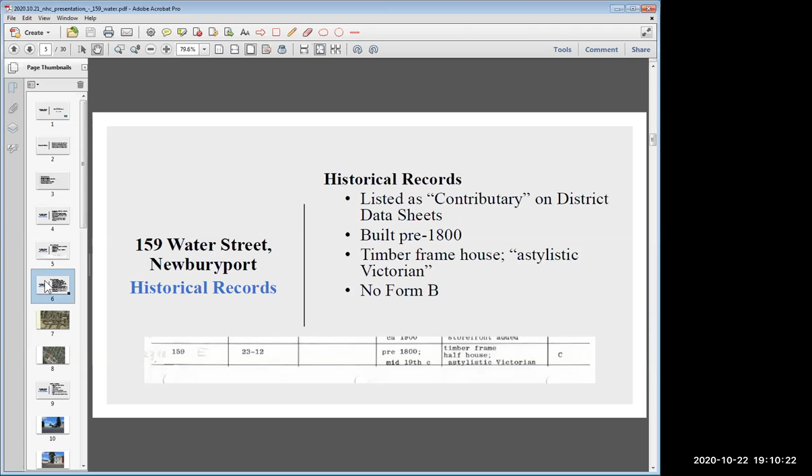If you go to the next slide please. We did a title search back to 1838. We stopped there because at the time, Moses Brown owned a significant portion of this property, including the wharfs. In the early 1800s, Moses Brown was an importer of sugar and molasses and owned a rum distillery in the city. Mr. Brown died in 1827, and this particular parcel of land was left to Mr. Brown's granddaughter, Sarah White Bannister. The property at one time included a store, operated by Ebenezer Plummer. Ms. Bannister conveyed the property to Mr. Plummer in 1838. Around 1929, the store was changed to a home and no longer used for commercial purposes.

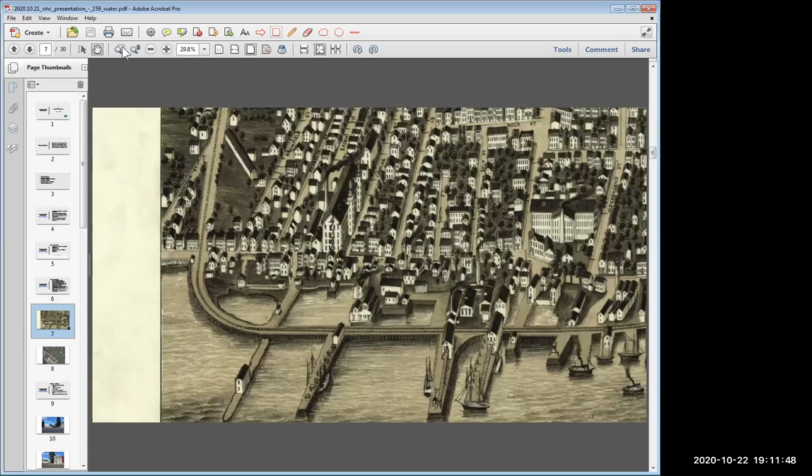If you go to the next slide, Andy. So this is obviously a sketch, not an actual map, but you can see the property - it's actually two separate buildings. If you see the James Steam Mill on the left third of the site, this property is at the bottom of the most leftward wharf that's shown down there. Can you blow that up a little bit, Andy, maybe? There you go.

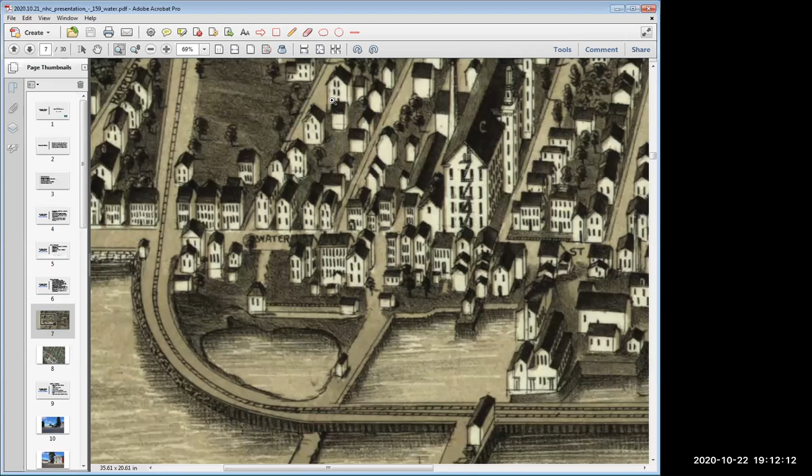So you can see the railroad tracks coming around, but the last wharf is actually at the base of Salem Street. You can see the James Steam Mill there. This property is right now, currently, and we're going to see that on the next slide, right next to the sewer treatment plant. It's at the base of Salem Street on Water Street.

This is the property right here. It's a greenhouse. If you're driving down the street, it's been on the market for a significant period of time. For, I think, obvious reasons, it's a difficult property to sell. My client has been successful rehabilitating a couple of properties here in Newburyport with the help of John Minton, and has purchased this property to do the same.

It's not in the Joppa Historic District, which of course starts further down on Bromfield Street, but it's near it. It has 1,620 square feet of living area and is a 2-story home.

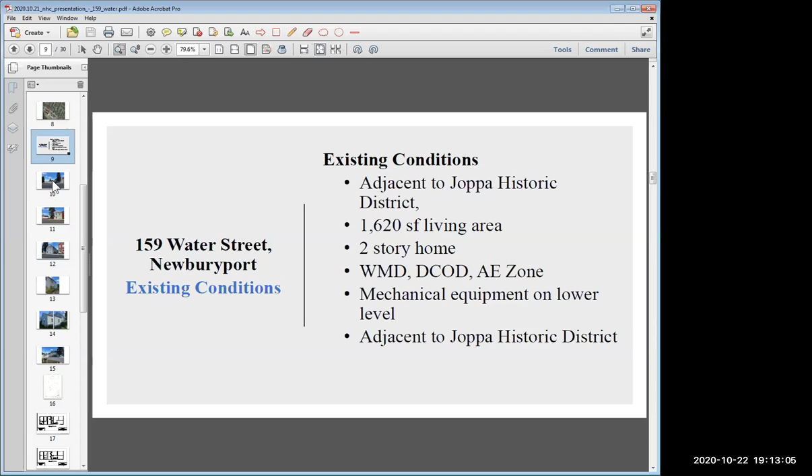Thank you. Ms. Mead, does anyone know when it was last actually lived in? Just curious, I'm going to guess it was a little over 2 years ago. I'm not positive, Mr. Richards. It's been on the market a significant period of time. I do recall cars down there, but time flies when you're in COVID, right?

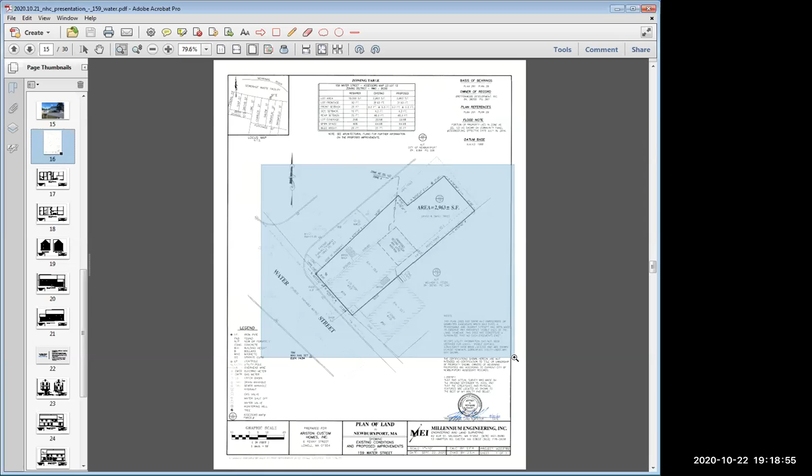Thank you. So if you go to the next slide, please, Andy. So you'll see, and what's important about the site plan is that while it appears as though there is a backyard, there's a drop in the elevation, and essentially you're sitting in the middle of the sewer treatment plant. So one part of the proposals is a little porch that's part of the second floor addition that we're adding in the rear.

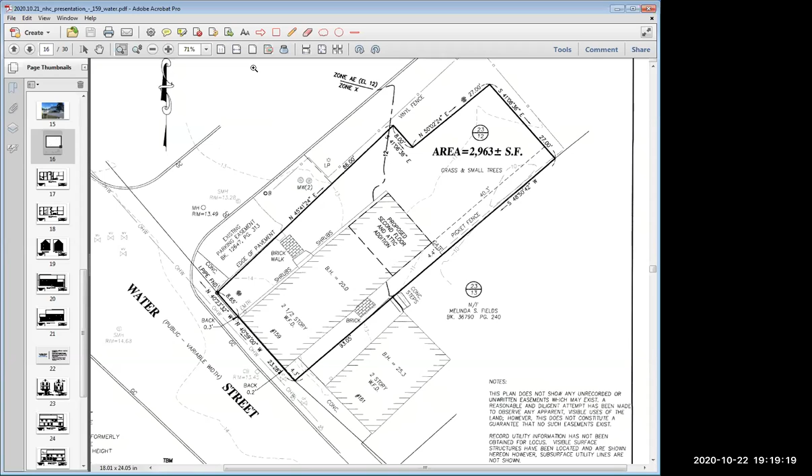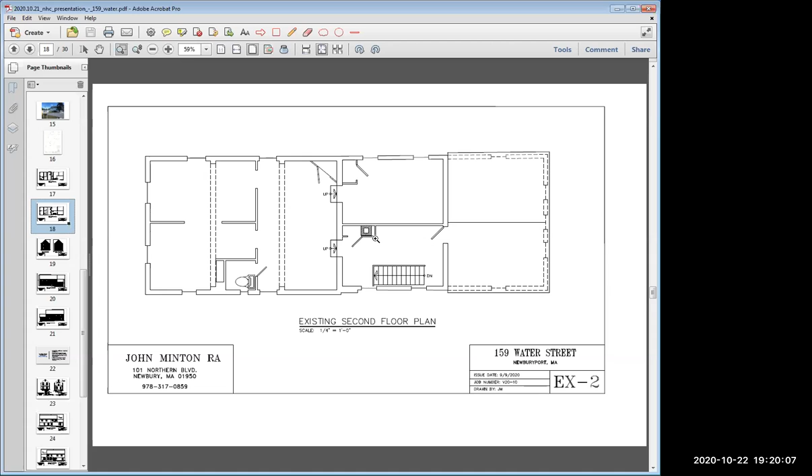So, and if you can go to the next slide. So this is the current second floor plan. You'll see that there's a water closet on the second floor and a couple of bedrooms. And then again, you can see that utility chase that is the chimney that goes up from the basement. And the next slide, please.

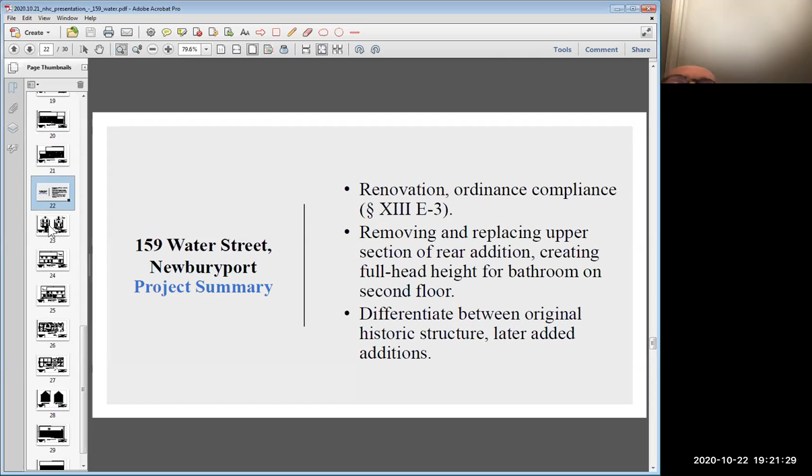So here's the demolition plan, and you can see where the demolition is occurring on the back, and the movement of the windows that exist, and the installation of flood vents.

Could you explain what the function of those is, very briefly? Just curious as to the function of those flood vents. What exactly are they supposed to do?

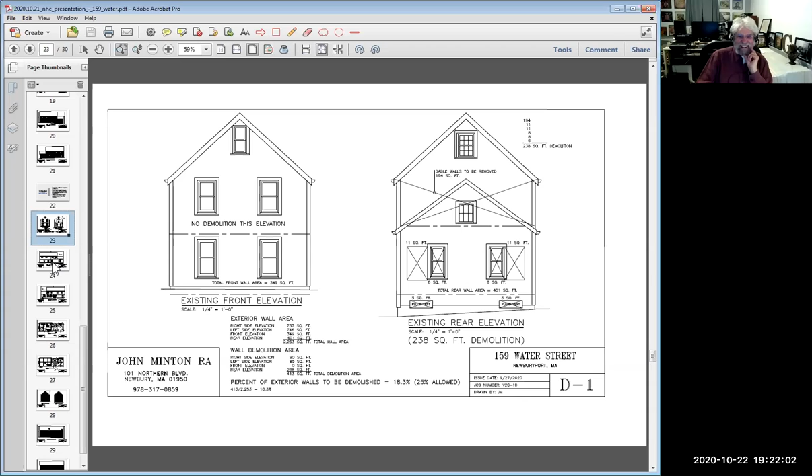I'm going to let Nitin explain the functionality of flood vents. I suspect it's to allow water to move in and out, but I don't know the answer to that for sure. Okay, Attorney Mead, I'm not sure, is he in the audience with us this evening?

We're not seeing him, he's calling in. Andy, you had the phone number earlier. His number doesn't appear to be here, though. Okay, so I can't explain the function of the flood vents. That's fine, not a problem—they are required if you have construction in the flood zone. Yep, not a problem. If we go to the next slide, please.

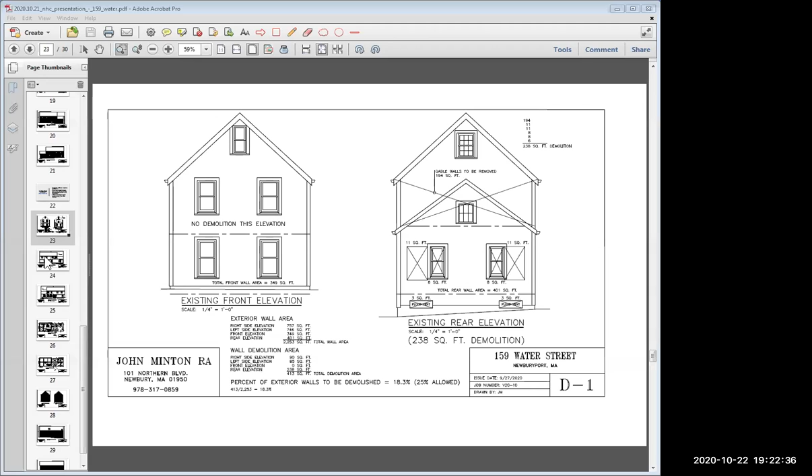So here's the changes that are going to occur on the east elevation. You'll see some changes in the window locations on that later addition, one change on the front addition, and changes in the back. The proposed siding will be cedar clapboard on the original structure, cedar shingles or shakes on the two newer additions. The windows will be the narrow profile, divided light with spacer bars in between, with the simulated divided light on both sides of the windows.

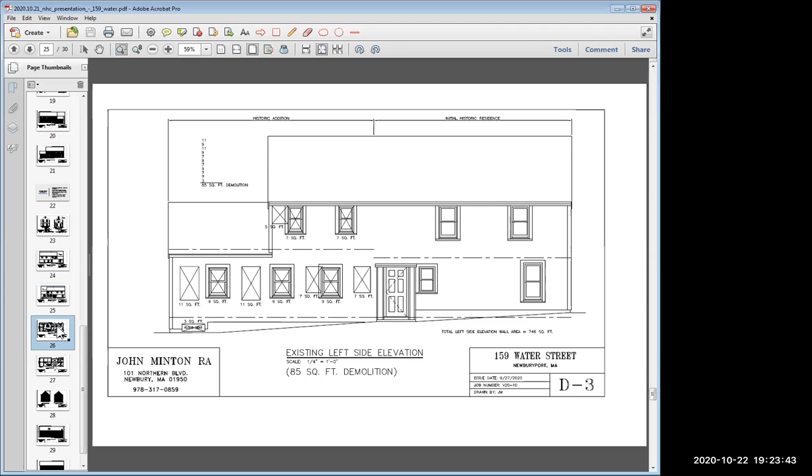Next slide, please, Andy. And so here's the west elevation, and you can see the changes to the windows—you'll understand these when we get to the floor plan. As you can see, changes are minimal, particularly on this side, none to the original historic structure. Next slide, please. And so here's the first floor plan.

It's a 2-bedroom house; he's not making it any more than that. It's going to have 2 bathrooms on the first floor. Then we'll go to the next slide, please, Andy.

The second floor will have a family room up front towards Water Street. As you can see in the back where we're getting a little bit of space, that's the half bath and the hatch into the attic so we can access the mechanicals. The kitchen and living space are up there, and then there's that little balcony off the back.

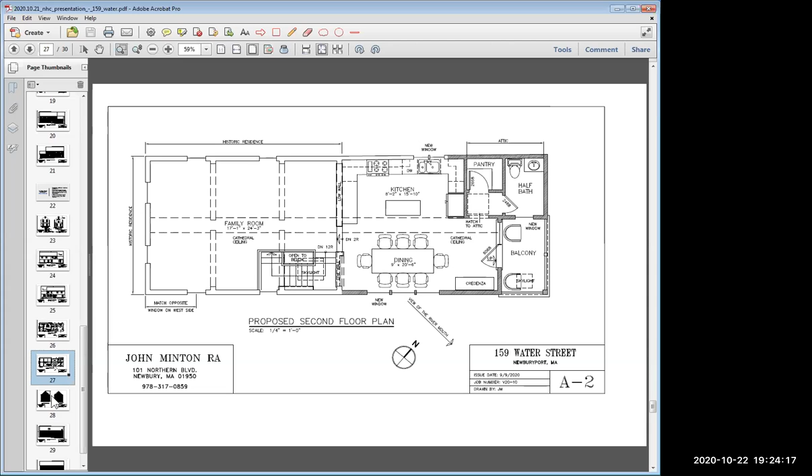Next slide, please, Andy. And here the changes are in elevation. So we have the proposed front elevation—again, no changes are occurring. And here's that rear elevation. So John used a change of materials to differentiate the old from the new.

And he included that when we get to the side elevation, the first addition as well as this second addition. Next slide please, Andy. And here's the proposed right side elevation, or the east. And the next—and the west side elevation.

So I think that our request is that you release it from demo delay to allow these improvements to occur. These are modest changes to allow this house to be functioning again. It has its challenges given its location, and we are trying to have minimal impact on the historic structure, but allow it to have some attractiveness by having that porch on the second floor for some outdoor space.

Because as I remind you, being in the backyard is, quite frankly, closer than comfort to the sewer treatment plant. So with that, I'd request the board vote to remove this from delay.

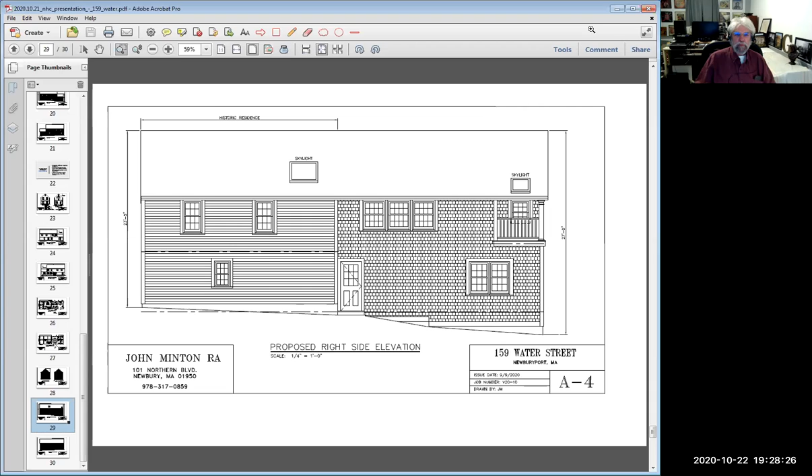I think it will be wonderful to see a project bring this house back to a form that is much more attractive, and I'm very pleased by the proposal. Okay, thank you.

Any other comments from my fellow commissioners? I'm in agreement with Patricia. Okay, that sounded like Mr. McNamee. Yes. Okay.

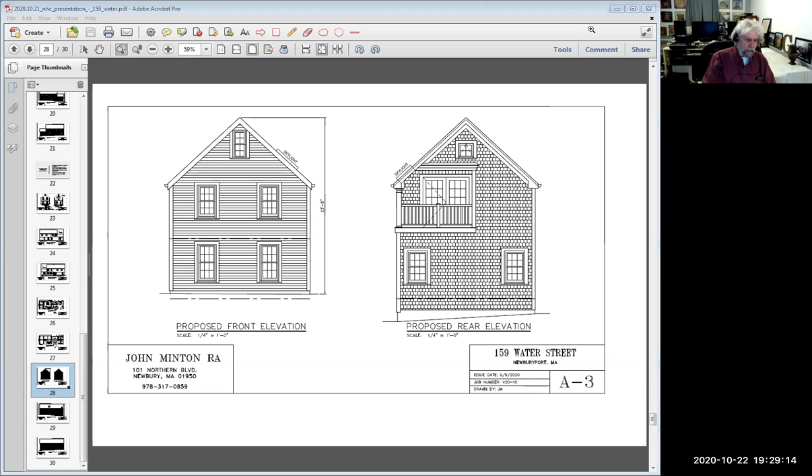I'll comment that I do too. I did have one quick question on either the proposed or existing drawing elevations - the chimney wasn't appearing. What did you comment on at the beginning? So what were you saying - is the chimney to go or to stay, Ms. Mead?

Yeah, it's to go. And I was pointing out that the existing elevations neglected to include it. You can see it in the photograph, but it was purposefully left out of the proposed elevations because it's actually a utility chase, not a chimney, for the home - some sort of heating system. So the utilities going up into the attic, I assume they'll have some other way of venting accomplished through other means. That's correct. Okay.

Okay, one last call for questions or comments. Not really seeing any - would anyone like to? There are a couple hands up. Oh, I'm sorry - Mr. Fay and Mr. Morgan. Okay, maybe I need to turn this on so I can see the hands. Okay, we'll start with Mr. Fay since you're first on my list. Christopher, you want to make a comment?

Yeah, I just want to say I don't love the tiny little porch roof deck in the back, but considering the overall condition of the house and stuff like that, I'll take the greater good here. But I don't want people to misinterpret my voting for this as a love of the roof deck, as tiny as it may be.

It's interesting you should point that out, because when I saw this, with the possible exception of that sort of Doric column, which is a little odd, I thought that enclosed little quasi porch patio, whatever you want to call it, on the second floor was somewhat less objectionable than some of the roof decks we've seen, which stick out more sore thumb-ishly. It's less objectionable, that's a good way to put it. Yeah, Mr. Morgan, you had a comment.

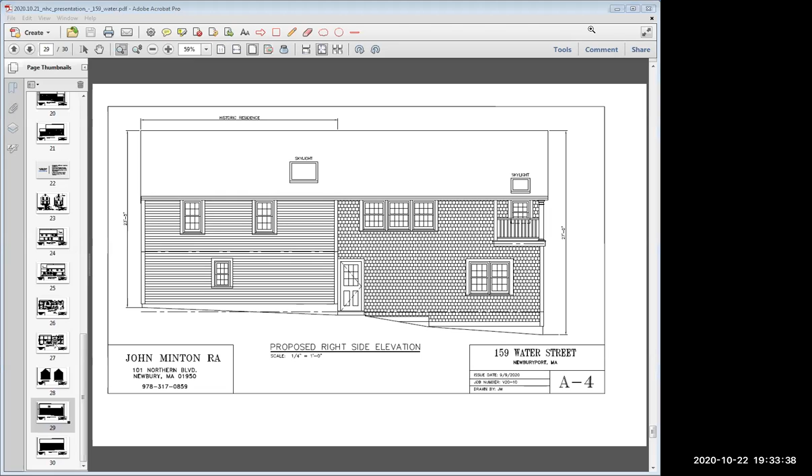I think, given the location of the property, they're not wood. I think they're aluminum clad, and they are the narrow profile with the spacer bars both inside and out, with separate grills inside and out. Okay, so yes, those are usually referred to as simulated divided light. Am I correct that those are considered simulated divided light? Yes.

Joe, can you think of anything else we should specify being called out? There's not a heck of a lot of trim there, really. Yeah, I think we would see that called out, the corner boards. It's really a material scope of items to be replaced. It looks like a lot of it is in pretty bad shape on the existing building, and I assume that much of it, if not most, will be replaced. But I think, for the record, it would be good to have those notes on the drawing. Eventually they're going to get here anyway, so we might as well see that at some point to establish a benchmark.

Okay. Well, I've got that list. So yeah, Attorney Mead, I think we can accomplish that. I don't think that's an unreasonable thing. So to save time, I'll try to craft the motion myself here and then see if someone was willing to second that.

So the motion would be that we release the project for a demolition permit following these plans as submitted tonight, with the condition that the specific materials be called out, including but not exclusively: that the clapboards in the front historic section be cedar clapboards, cedar shingles or shakes on the newer section, 6/6 simulated divided light windows, and specific call out for trim materials such as the window trim and corner boards, be identified prior to the issuing of the actual permit.

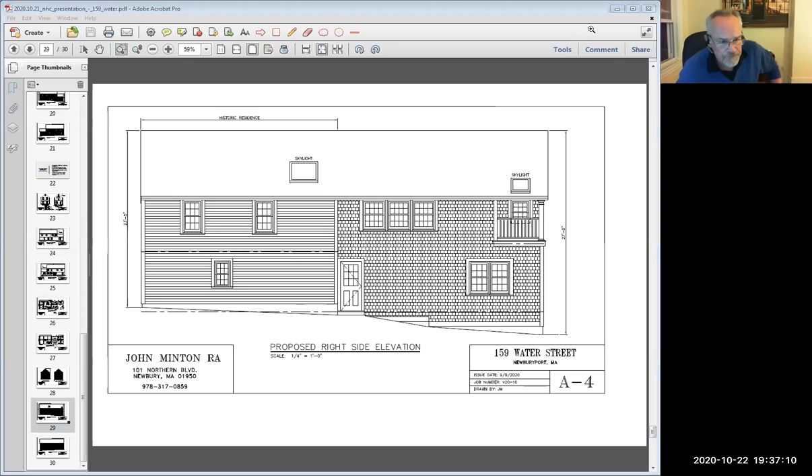I'm just pausing here because I'm trying to think of the most expedient way to meet that condition, Attorney Mead, so that we can resolve this in a way that we're satisfied and the building commissioner is satisfied and your client has the final plans we can go on and all that. Is that something that you can have either the architect or someone submit to the planning office, sometime within the next week or so?

Yes, we'll ask the architect to do that for sure, because as soon as we're done with the zoning board, they're going to want to pull a building permit. So we will definitely do that. Okay, I'll make a note here. Applicant to submit.

Thank you very much. Okay, good. Forgive me for trying to keep up and make my notes and keep everything going here. I believe we are then done with 159 Water Street as far as this meeting anyway.

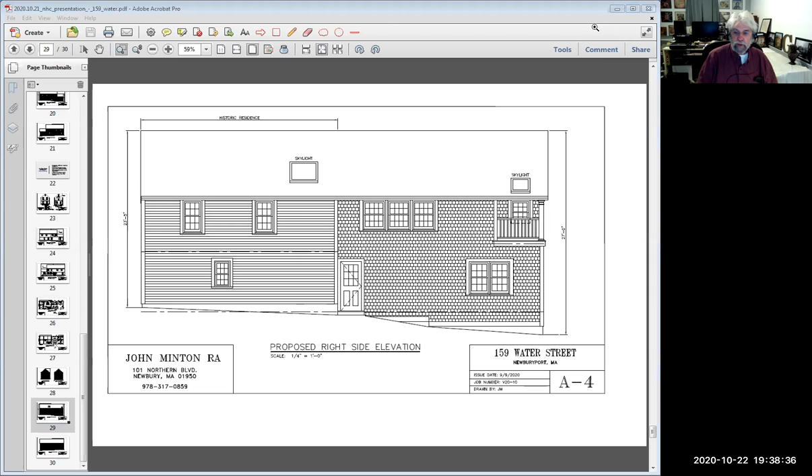So next, we can move on to the next item on the agenda, which is 93 State Street, Institution for Savings, commonly known as. This is a Demolition Overlay District Advisory Review. I'm not going to go into the entire history. It goes all the way back to the beginning of the year. I know.

I'd be surprised if anyone wasn't familiar with it, but the high points are that this is roughly, if we issue an advisory review again, which I expect we will, it will be the third one. The first was 13th of February this year. Then there was another one on 25th of June. And this is the third go round. Two weeks ago, there was a presentation by the applicant, which went through plans, elevations, renderings, and so forth. And we also took public comment at that time, which was fairly extensive.

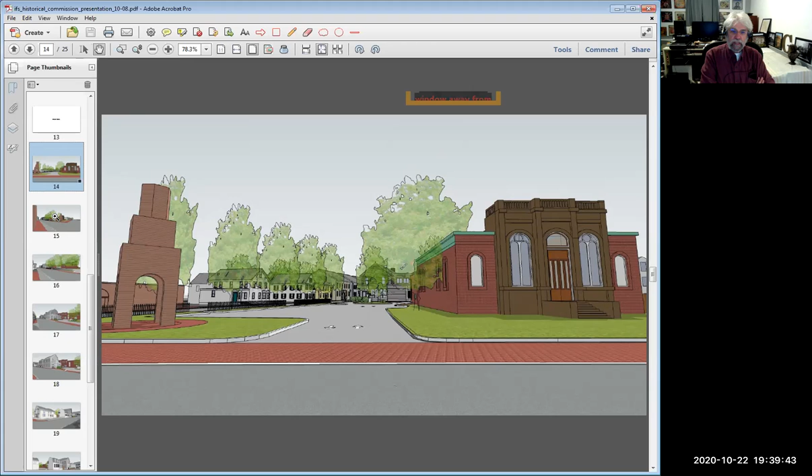We heard similar comments as we heard the first go around, some reflective of the newer thing, but some pretty much echoing earlier concerns. My goal tonight is to go around with my fellow board members here to collect their thoughts so that I can compile them into this third advisory review.

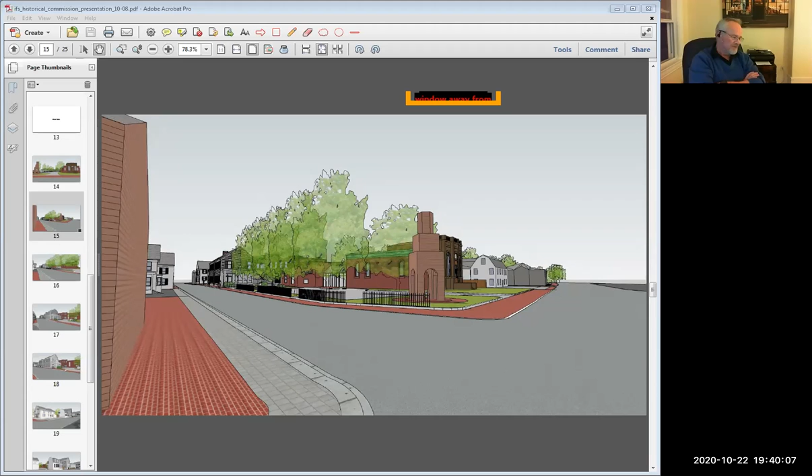Could you recognize Mr. McNamee before we start on this? Oh, he probably wants to say that he's recusing himself. Am I right, Peter? Once again, because I'm an interested party, yes, I'm going to recuse myself. Thank you, Chair. Yes, I had it in my notes to mention that, and I forgot to point it out. Thank you, Peter. So Mr. McNamee, I'm not sure he's in abutter, but he's a near neighbor and is an interested party, so he's recused himself from this particular matter. Thank you, Peter.

Anyway, so Attorney Mead, I assume you're still speaking on behalf of the applicant. Although we're not going through the entire presentation again, I thought if you want to just make any brief comments or updates since we last spoke two weeks ago, you can have the floor for a couple of minutes to do that before I go around with my fellow commissioners. Do you wish to do that?

I think I'd prefer to respond to any questions. Christopher Angelakis is on, as well as Shreya Shah, who are the architects on the project. I think we had some discussion two weeks ago by Mr. Morgan and others relative to the location and differentiation of the proposed addition compared to the historical structure, and how it's now separate and apart from it. And the discussion relative to the massing and scale being appropriate for the neighborhood. So I'd like to just hear what the commission has to say and then answer any questions that Christopher and I need to.

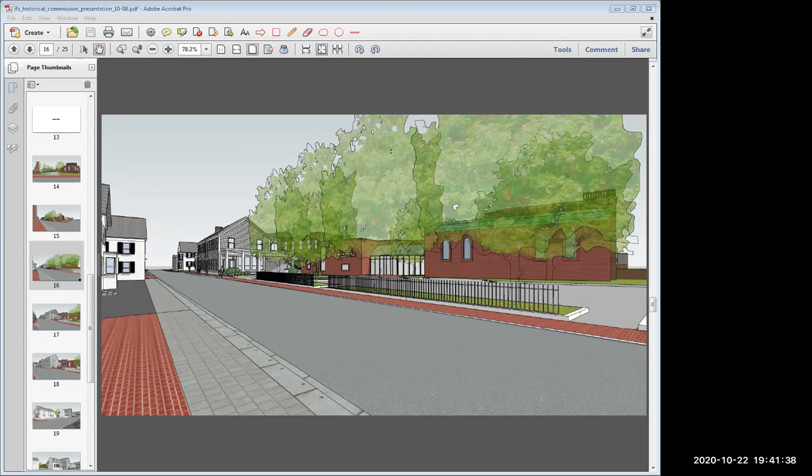Okay, that sounds fine. And I'll abuse my right here as chair to kick it off. I had a question that was on my mind, so I'll start there. This is a question for either you or the architect. One of the things we all heard a lot of, people would generically use the term size, or massing, or height, but there's still a lot of concern about that. It seems to me that a lot of what's driving that is the parking system on the first floor, because that's driving the height of the first floor to about 16 feet, which is obviously higher than a typical first floor would be. I think that sets the stage for everything else above it to also be higher than normal. So my question is, was there any research or consideration of whether it'd be possible to somehow bring that whole parking system down a few feet, so that first floor ceiling height and eave height could be much more on a par with a residential type of environment?

So I think that's a really good question, Mr. Chair. The parking is compressed as it can be. We actually cannot go down any other levels within the building. We have one level below grade, which is what the fire department will approve. They won't approve anything more than that. I think it's important that from the very first concept design of this current design, there were some concerns relative to the eave height. I'll let Christopher address that in a minute, but we did bring the eave height down from that. So the eave height is now at 25, and the buildings across the street, which are actually much larger buildings, both by their frontage along Prospect Street and their depth away from Prospect Street, are just over a foot shorter than that. So this structure is not out of line with the surrounding neighborhood. I think that's a good handoff to Christopher about how they designed these sections and the height of the building.

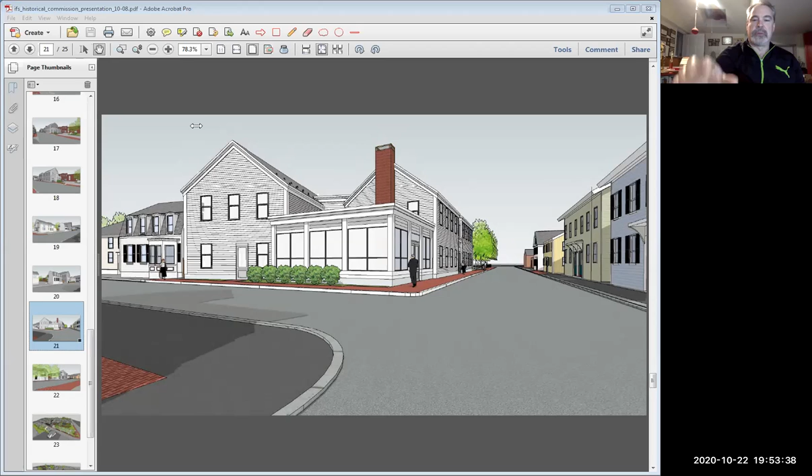I don't have anything new to add than what I've said in the past, but I'll say the same thing over. I walked down State Street a couple of days ago. I stopped, I looked at the bank from the front. You see the beautiful building. You see this weird addition in the back that probably should have never been done. And then you sort of see the emptiness, and I tried to imagine it. And one of the things that struck me is it looks great. It really does. I think the combination of suggestions that we provided and the work that's been done here looks great. It's just doesn't look great here.

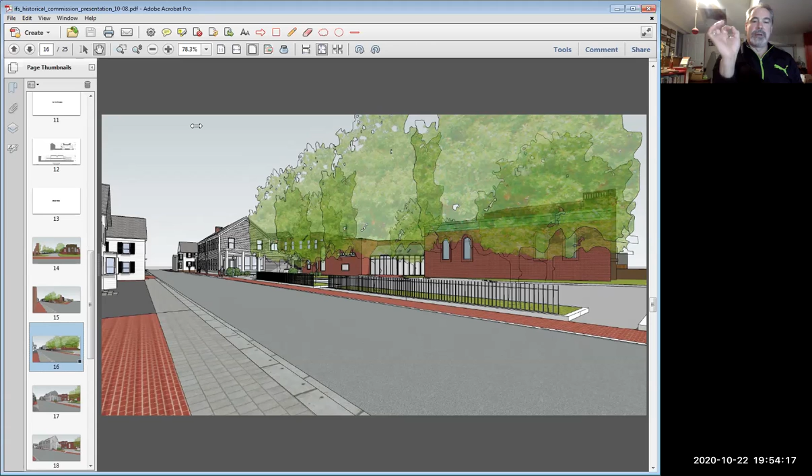It would be great if we did buildings like this in other places in the city, outside of the downtown, outside of historic areas, out in the plazas. If they had done the plazas like this, how much nicer would it be? I just don't think it works here. It looks, again, like a serpent. The way it is currently constituted, this addition would do more to that, and, to beat down on a metaphor, it's going to swallow up this neighborhood. And I think maybe the other slide, that aerial view, it's just shocking to me how big the size of the footprint is. So I don't have anything new to add, I just have the old stuff to add. I don't support this. Unfortunately, I just don't support it.

Okay, so when you say, Chris, it looks great but doesn't look great here... excuse me, I'll get to you in one second, Ron. I just want to clarify one thing. When you say looks great but doesn't look great here, you're saying in the context of this little neighborhood. Is that what you mean, Chris?

I think it's a good idea, but it just doesn't fit the city here. If it was out at the other, I believe there's another branch or another set of buildings out near the Dunkin' Donuts on One, Storey Ave, yeah, it would be good. And that's a beautiful building, and it fits there. It's the best building in the area.

You know, a lot of people do this. They have these types of regulations. I think about Freeport, their McDonald's looks like this, right? But it's not in a downtown historic area, and the neighborhood doesn't support it. So I don't know why people are pushing for this, as I wouldn't want this across from me, next to me, down the street from me.

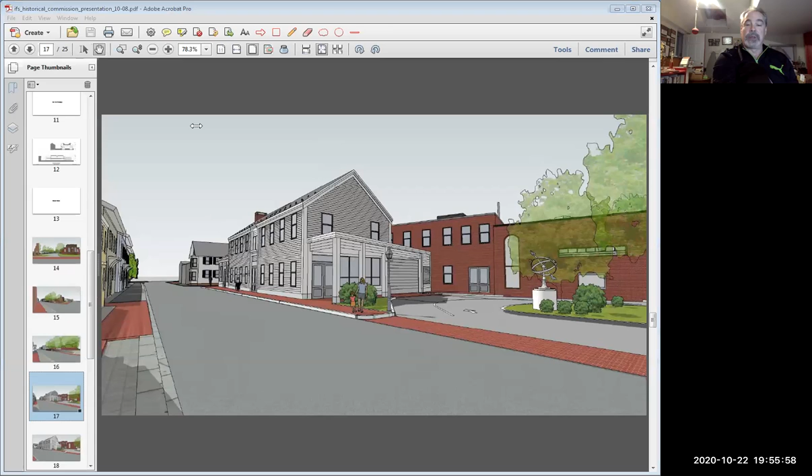Thanks, Chris. And I think one more thing - I know it's zoned for commercial, but that doesn't mean you have to do it. Just because it's zoned for that doesn't mean you have to go ahead and do it.

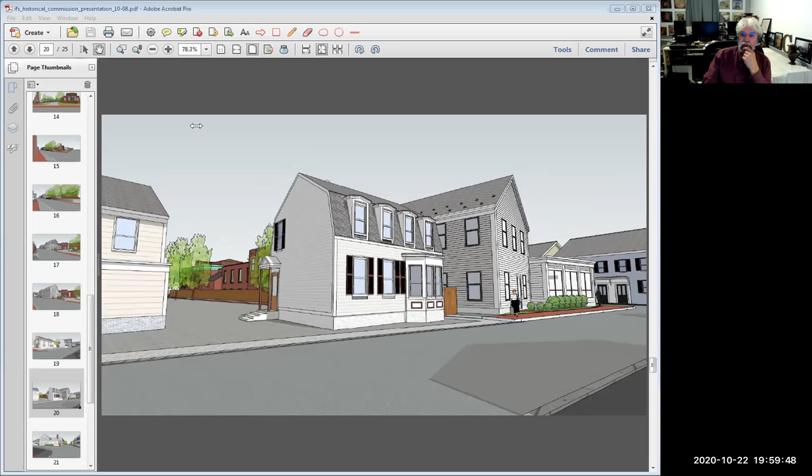Great, okay. So the DOD ordinance, as we all know, requires our adherence to any relevant provisions of the Secretary of the Interior standards, as they may be amended from time to time, including all related guidelines, bulletins, and other official guidance promulgated by the National Park Service. So the National Park Service interprets the standards in its various bulletins.

So I went through what those related guidelines and bulletins and the official guidance says about additions to historic buildings and how to assess their impact on a historic neighborhood. So I want to go through the first one.

In its Technical Preservation Services brief on new additions to historic buildings, the National Park Service explains that in accordance with Standard 9, a new addition must be compatible with the historic building's massing, size, and scale. The quote: size, scale, and massing pertain to the addition's overall volume and three-dimensional qualities. Together they are critical for ensuring a new addition is subordinate to the historic building. Typically, a compatible addition should be smaller than the historic building in both height and footprint, though depending on location, an addition slightly taller or larger may be acceptable as long as it remains visually subordinate.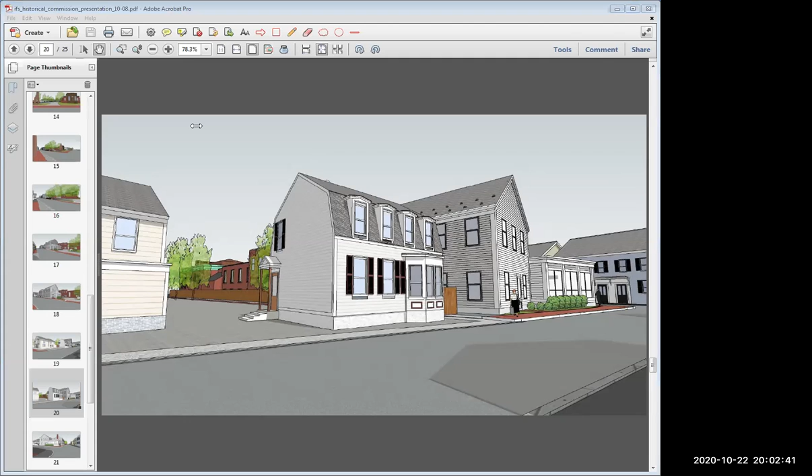The third publication I looked at is New Exterior Additions on Historic Buildings, Preservation Concerns, in which the National Park Service says a new addition should always be subordinate and not compete in size or scale. Although the appropriate size can't be stated as a square footage ratio, the size and setting help define the general parameters for enlargement, and correctly assessing the relationship between actual size and relative scale is the key. The terms size, scale, and massing are repeated throughout National Park Service publications in relation to the historic structure and to the setting and context buildings.

The next publication I looked at, New Additions to Historic Buildings, says that when visible and in close proximity to historic buildings, the new construction must be subordinate to those buildings.

The fifth one I looked at is New Construction Within the Boundaries of Historic Properties, a Technical Preservation Services brief, meaning new construction on the same lot as a historic property. It says the limitations on the size and scale of new construction may be less critical the farther it is located from any other historic building. The quote: protecting the historic setting and context of a property, including the degree of open space and building density, must always be considered when planning new construction on a historic site.

The next one I looked at, New Exterior Additions to Historic Buildings, Preservation Concerns, Guidance on New Additions, says certain historic structures may be so massive in size that a relatively large scale addition may not compromise the historic character, provided the addition is still smaller than the historic building. Occasionally the visible size of an addition can be reduced by placing some spaces or support systems underground.

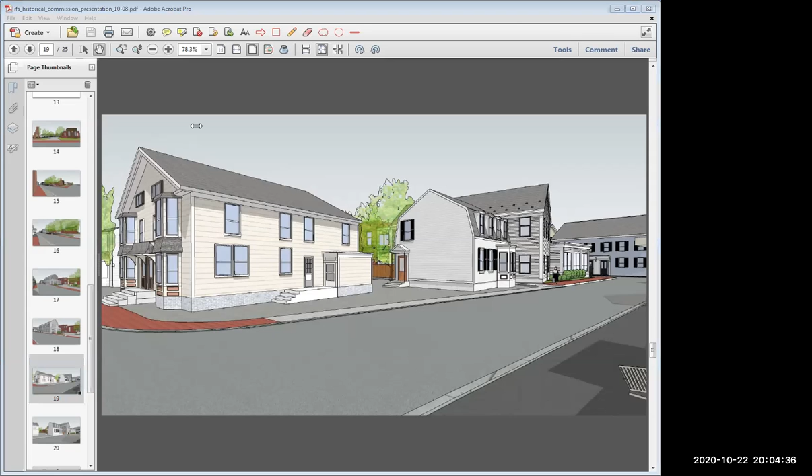Next I looked at a document called Incompatible New Additions to Historic Buildings, which I can't show you, but there's an illustration in figure 16 showing that doubling the size of a historic building means it won't meet the standards. The next one is Designing a New Exterior Addition to a Historic Building, and the Park Service says the new addition should be smaller than the historic building and should be subordinate in both size and design to the historic building.

The last one I'll quote from today, New Additions in Densely Built Environments, says it's important to design an addition that will have the least impact on the historic building and district, and that the addition has to reinforce the scale and character of the district.

Speaking just as myself, without having read any of that, do I love Joe Morgan's idea about how to make the design of the addition fit in better?

Do I respect all the work that these architects put into the design? I very much do. I think these architects are very impressive. I think the design seeks to put the structure into conversation with the residential buildings by trying to break up the massing and incorporating design elements from the historic houses. I love the wooden painted doors.

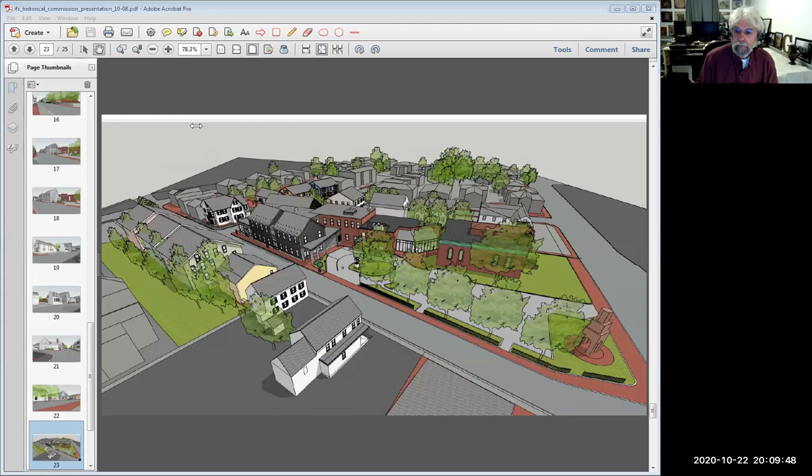Now, your hand is still up. You said you're on the phone right now, Patricia? Yes, I'll try to put my hand down. I know *9 raises it, so maybe *9 will lower it. I don't know, okay, I'll try. Ignore me until I yell.

Okay, very good. Were you all set, Patricia, as far as comments? Yes, I am. Thank you very much.

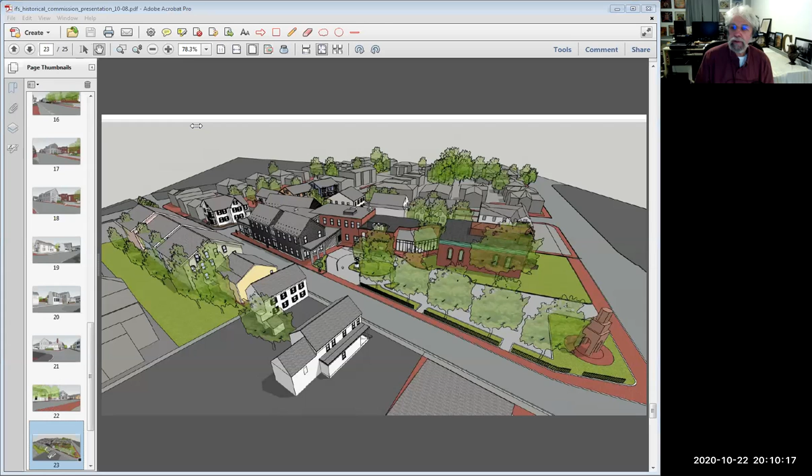Okay, any other member of our group have a comment? We've heard from Joe, Ron. I guess we've heard from just about everybody. Peter has recused himself, so we won't be hearing from Peter. I've asked a couple of questions.

It's an interesting situation. I will compile all this. I'll kind of wrap this up. It's a tough one. I'll give one last brief opportunity for either the architect or the attorney, Ms. Mead, if you'd like to make any closing remarks before we move on to the next agenda item.

Thank you, Mr. Chair. I think that I actually might disagree with the analysis that Ms. Pecknick did under the fresh test. And in fact, I think it actually highlights how the new design complies with those criteria. But because I am not the designer and Christopher is, I will let him have the closing comments.

Okay, that's Mr. Angelakis. Did you, yes, do you want to do that?

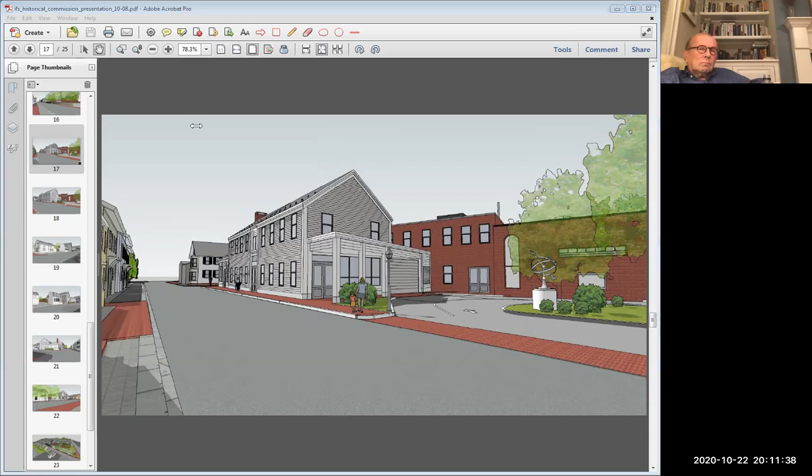Yes. Well, thank you. I think those standards are very important, and I think this team has read those standards over and over again, and we have did everything possible. And I think that this commission has acknowledged that we've done everything possible here to play a very nuanced hand to make sure that this project is subordinate to the historic building that's 150 feet away.

I would challenge that we are doing an addition to the 1871 building. I think we can all agree that that is not what's happening. This building may be placed in a historic setting, but I think we've checked off all of those check boxes to the fresh test in relationship to the historic setting. There are certainly buildings that hold equally as large a footprint, and I think that's the one that challenges us against the fresh test the best.

But if you think about this building as being placed within a historic setting and not a building that's being attached directly to a historic building, I think we can all say that this building does pass that fresh test. So I think saying anything more would be redundant. I'm happy to respond to anyone else's comments if they wish.

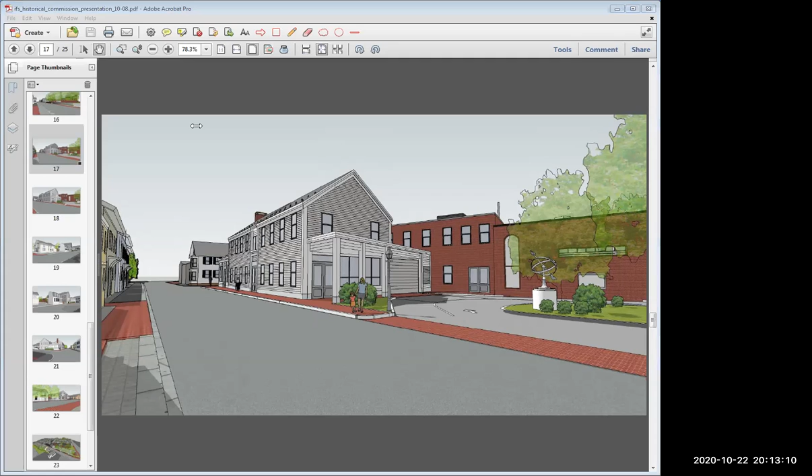I think we're okay. I'll just check in one last time. I'm not seeing any hands raised on the part of the commission. Going once, going twice. I think we're good there. Okay. No, I think we're good.

I appreciate very much your attendance once again. I know it's been trying, a long haul, both for the applicants, the architects, the attorneys, for everybody, and the commission, and the members of the public. I know there are probably a lot of members of the public watching this Zoom meeting right now. I'm not keeping track, but I know the public is extremely interested in this, and we'll do our best, meaning the Historic Commission, to provide whatever meaningful guidance we can to the planning board in that report. So thank you very much for that presentation.

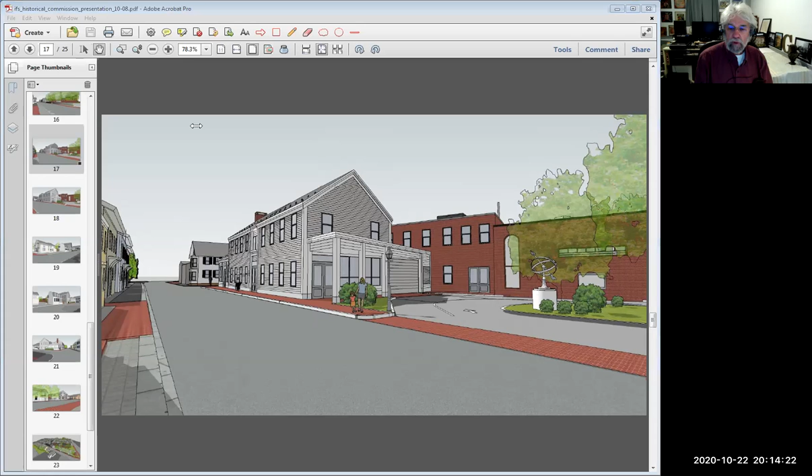Okay, I think we can move on to the next agenda item, which is, well, I was going to say next door, but it's not next door. It's across the street, 94 State Street. This is the Newburyport Public Library building.

The background here is this is a discussion of the preservation restriction for the public library. The public library has applied for, and I think they've got tentative approval for, some grant money from CPA for the HVAC system to make sure that their very valuable and important collections are well preserved.

As part of that arrangement, they do need to have a preservation restriction on the property, which they should have anyway. I'll point out that because this is a building owned by the city, the Historical Commission would not be the grantee of this; it would be the Museum of Old Newbury. So when we get to that point, if Ms. Susan Edwards, who's with the museum, is here and would like to speak, we'll certainly allow her comment on this.

First, so that's the background of this, and I would be remiss if I didn't thank our member Joe Morgan for his very, very helpful work on putting together this preservation restriction, particularly the excellent description of the property.

So Ms. Giselle Stevens, are you there in the attendees? Oh yeah, and I see your hand is up, great. So Andy, can you unmute Ms. Stevens so she can address the board here? Yes, go ahead. All right, good evening, everyone. Can you hear me? We can hear you.

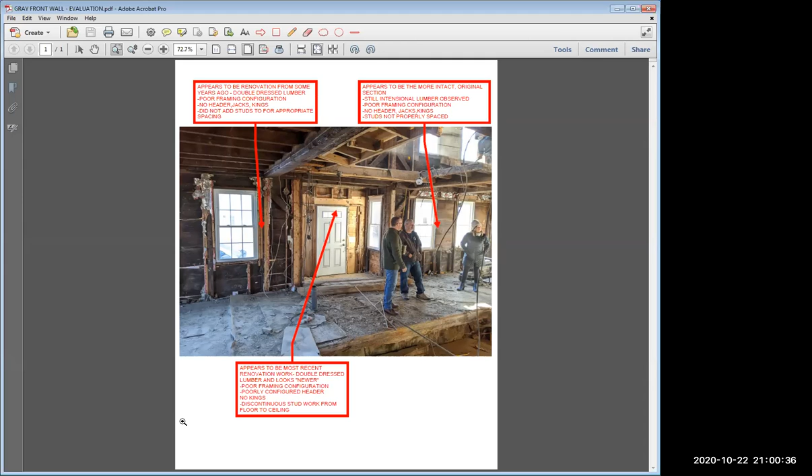I guess this might be where I come in. Who's speaking? This is Dan Webb, Webb Structural Services. I was retained as the engineer for this project.

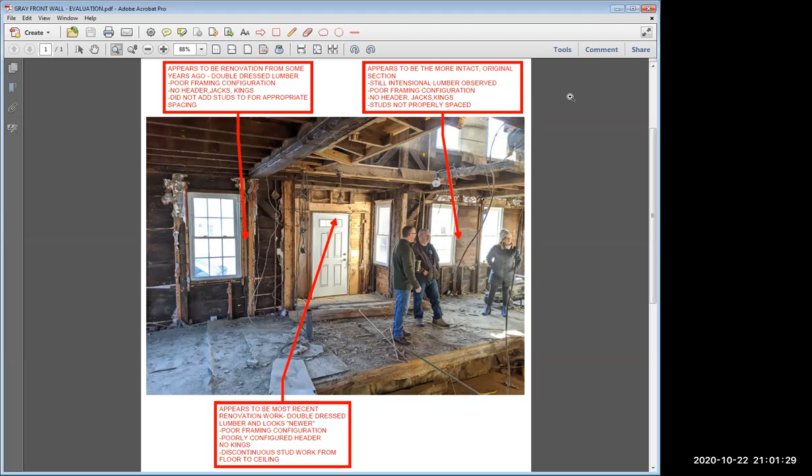Thank you. So I think a picture is worth a thousand words, and this one's great. Starting from right to left on the screen, short of my chicken scratch notes, part of which are even illegible, you can see over on the right, zooming in, a little bit more of the original framing of the building, just by the characteristics of the wood. And you can see how poorly configured it was.

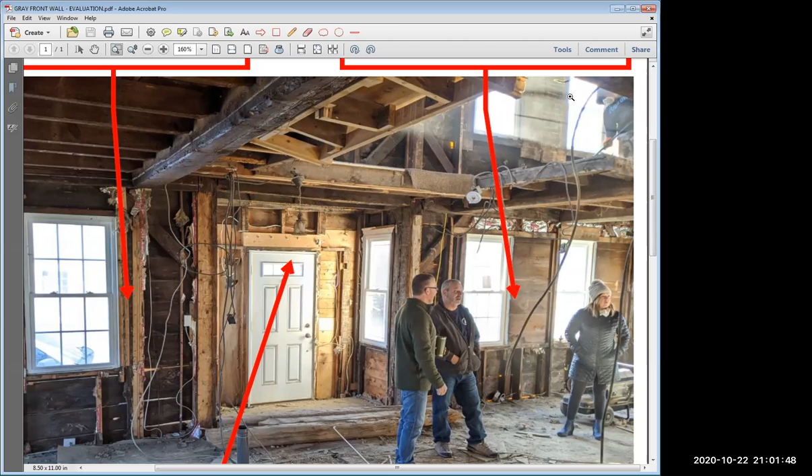There could have also been a window alteration in this area at some point in time, but you can see how the framing is clearly not up to code. The spacing is not appropriate. Wall sheathing is acting more as a structural element than a sheathing element. And the window is certainly not supported properly on its sides. So that's kind of what I would consider the most vintage framing of this building.

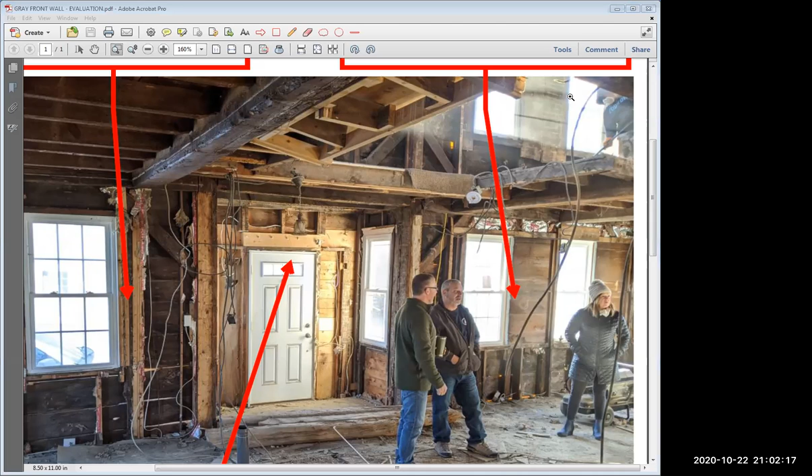If you were to then hop all the way over to the left side of the building—well, just a quick question first: that big opening above your heads there, how did that happen? Like where the second floor is partly missing, was that intentional? I believe, correct me if I'm wrong, that was an existing opening for the stairway that was poorly framed and kind of falling in. A lot of these buildings, the main structural characteristic is they stay up purely out of habit.

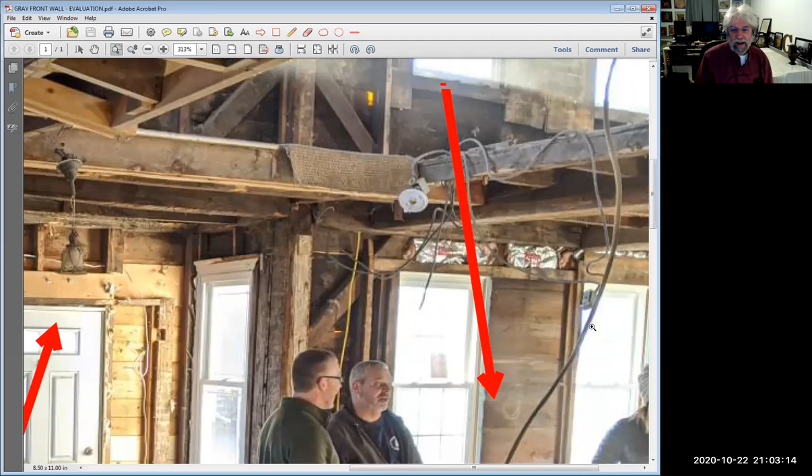Yeah, and am I seeing this photo right? There's two gentlemen on the left, and the window right behind them looks like there's a stud that just stops rather than going all the way up to the upper plate. Am I seeing that right? Oh yes, you are. Yeah, I see what you mean. In fact, the arrow is pointing pretty much in that direction. Thanks, Andy, for the zoom. Yeah, looks like quite the hodgepodge.

Well, I kind of interrupted you there—why don't you go ahead with your exposition? If we could zoom back out again, over onto the left side, you can see this looks like a past renovation, probably 70s or 80s. The quality of the work they did is really terrible. They did not do this building any justice. The window was thrown in, they threw in a couple of extra studs next to one, there's no appropriate header, and I don't even think there's a proper sill to the window.

So that was done maybe 10, 15 years ago—again, don't quote me on that, I'm not sure. But then the most recent renovation, in my opinion, is over by the front door. This one's pretty significant. Like the past two, I could almost imagine they were doing a window replacement, but here they've actually removed exterior sheathing of the building and replaced some of it. They tried to put some sort of header over the door, but you can see there is no continuous stud work in this section of the building, and the header isn't continuous either.

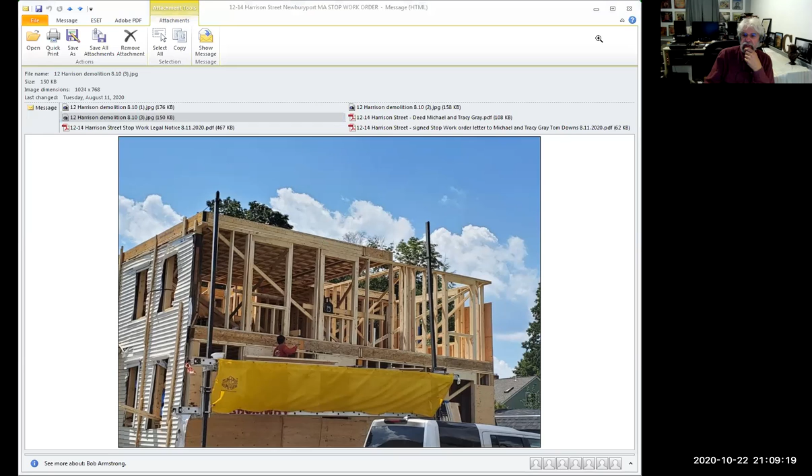I'll read you a brief excerpt from a letter from May 19th from Attorney Griffin about why. He's saying, quote: the project does not trigger the requirements for a DCOD special permit. The demolition threshold was not reached, as no exterior building walls are being demolished, unquote.

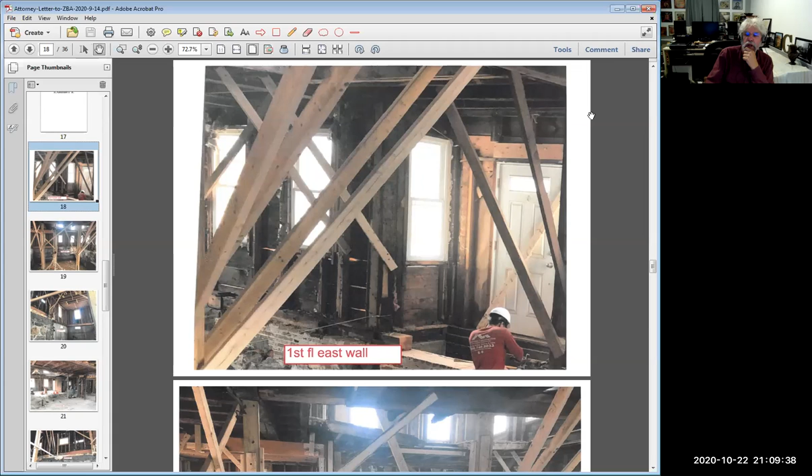That was before - I'm sorry to interrupt - that was before we had stripped the sheetrock and saw what we were dealing with on the inside. So the thought was that you could just strip the interior, and because of the raising of the roof, how was that going to be accomplished from an engineering point, without doing any wall demo? I'm just really curious about that.

Well, you don't necessarily demo the walls, but you do reinforce them to a state that they are load bearing capable. So it isn't uncommon, with a structure that is suitable for reinforcing, to lace in new material to make it code compliant to today's standards. So the idea is you take off the interior wall, since you're demoing the interior anyway, and then you can get in there to do any reinforcing - is that the idea? Correct.

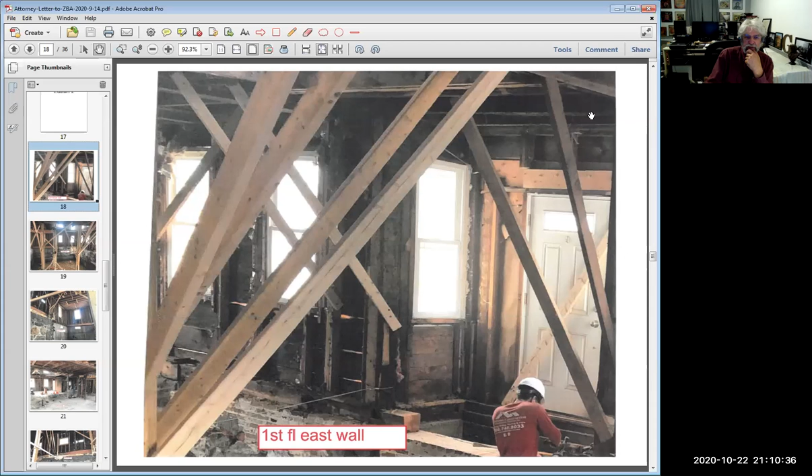It looks like there's another beam right where it says first floor east wall - looks like another beam that's cut off. Anyway, are these the photos that we were looking for earlier?

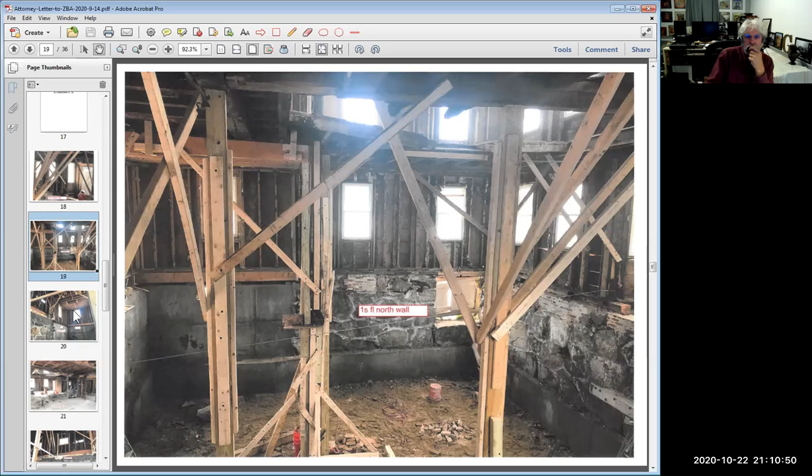Yes. Now that wall - yeah, this looks like it's looking towards the river. Yes, it is.

Yeah, there's that bulkhead for the cellar entry there.

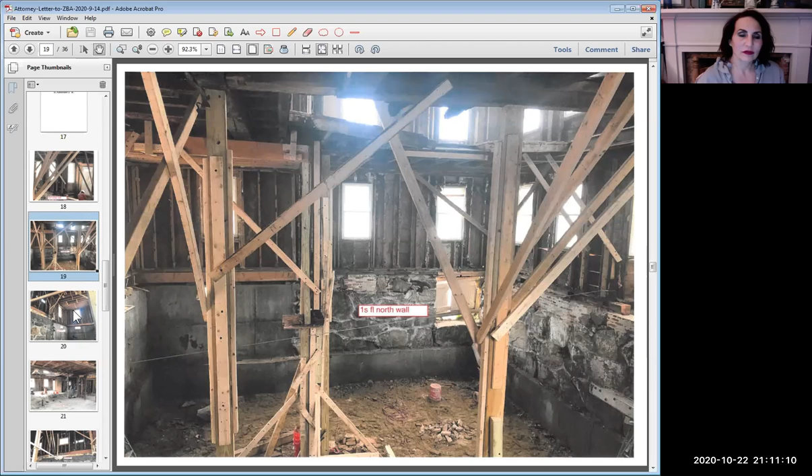Can you just clarify what is being asked of the commission right now? Well, as I understand it, our role is to give a historical report to the Zoning Board of Appeals about the historical characteristics of the house. Unfortunately, many of those are no longer in existence, so that's why I asked my question about documentation.

What documentation might there be of what was there before some of this demo was done? Mr. Richards, what you're looking at right now wasn't done by me. This was done by the previous owners. The exterior wall you're looking at, not the bracing, but that wall, that's not me. The existing framing had been taken out a long time ago and reframed to what you see here right now.

So those are like regular 2x4 studs there? Yes. If I may interject, this is Mr. Mack again.

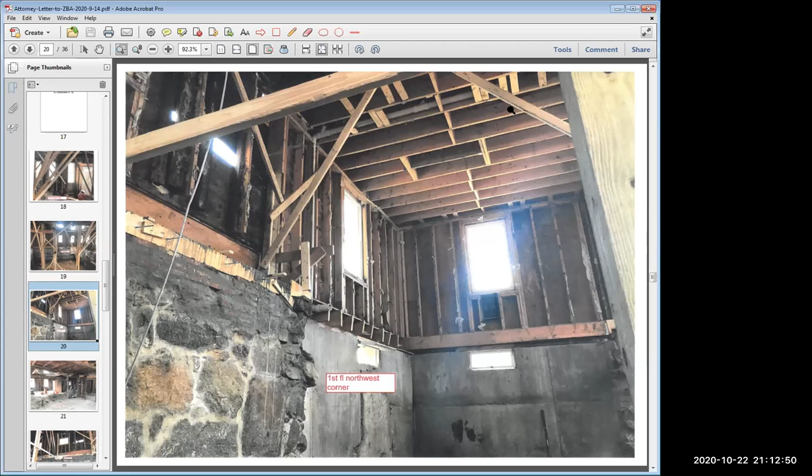I think this is an unusual situation, because the review has already been done, and from a historical standpoint, all the features that were at issue before when you reviewed this are the same now. The only thing that's different is the removal of the framing, which isn't even clear was the original framing at all, and it's not even safe according to the engineer. So it's challenging because you're trying to do something retroactively, but if I could submit, the document or review you'd provide to the ZBA would be, if I were writing it, that you just restate the review you made in May, with the only changes being necessitated by the structural deficiency of the framing, and not having any substantial detrimental effect on historical features. Something along those lines.

The time for the applicant's presentation is up. I'm keeping track of 15 minutes, and I'd like to know what is expected of the commission. Are we voting on historically significant and preferably preserved?

No, it's one of those. This permit is where we have to... it's a little bit like the Institution for Savings. We have to prepare a historical report. In this case, it's not for the planning board, it's for the ZBA. So the ZBA is the permit granting authority here, and they're looking for a permit from the ZBA. So we don't need to make a motion.

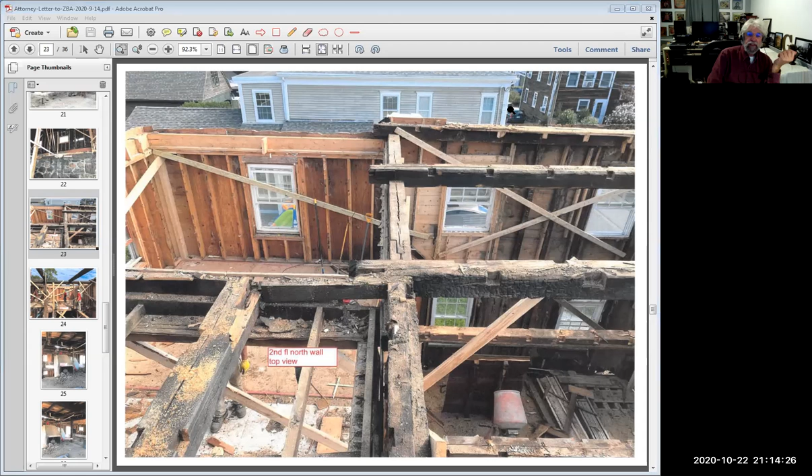In fact, we already did that. We voted and it was deemed historically significant and preferably preserved a few months ago. And they had the okay to... well, let me make sure I'm not making a mistake. No, I think we sent a report to the ZBA back then.

Oh, no, I'm sorry. The ZBA back then was just voting on the upward extension of the nonconformity, where there was an existing nonconformity in the roof or something. Since they were raising the roof, there was a roof line change, and that existing nonconformity was being extended, so they needed a permit for that. So I hope I'm not muddying the waters here.

I'd like to, are we going to be allowed to speak? Yes, absolutely. I know I've been kind of monopolizing this with my questions.

I'll just add one more thing so we're all straight here, because I see a lot of new lumber and some older stuff, and I want all of us to understand what was there when Mr. Gray purchased the place. Was all this interior gone then?

Yes, Mr. Richards, what you're looking at right now is what we exposed when we took down the sheetrock. So these missing floors and stuff, is that... Oh, no, the missing floors were from us. We were taking the interior out. Most of that hole was from the stairwell and the chimney.

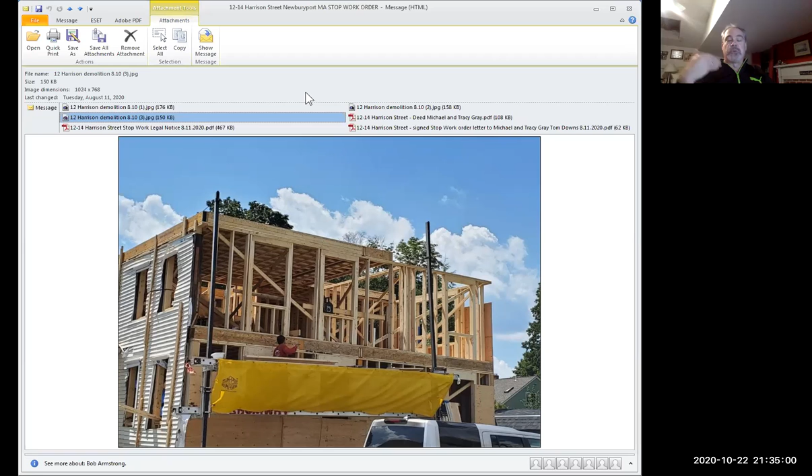And twice, I believe, we got assurances: I'm not going to do this. We asked them to change the design. We raised concerns about features of the house that we didn't consider historically accurate, like a roof deck. And yet here we are. Then you wake up one day and it appears that the house is sort of gone. This was assured to be an improvement on the house. That's what the neighbor said, this will be an improvement. It does not appear to be an improvement. That's all I'll have to say on this one.

Thank you, Chris. I'm frantically typing down these comments to capture them. All right, well, unless there are any more comments from the team here, I think I want to wrap this up.

I'll reserve the right to consult with you guys further on this. I'll put together some notes that might constitute a report, but given the nature of this, I'll make up a draft and we can come back to it to see if everyone feels that what I come up with is adequate to the situation.

Well, can I have just a brief moment? Is that Mr. Mack? Yes, please. Brief, very please. Yes, I appreciate it. First, I obviously was not at any of the prior meetings, and I myself was a planning board member in Beverly for close to 15 years.

There were times I remember myself being perturbed that work was done in the field that probably should not have been done. But from where we are now, all the interior work, the framing is the thing that changed. The rest of the interior work had already been approved by the building department and the ZBA. The issue with the framing is that the changes done to this structure were not done to remove historical features.